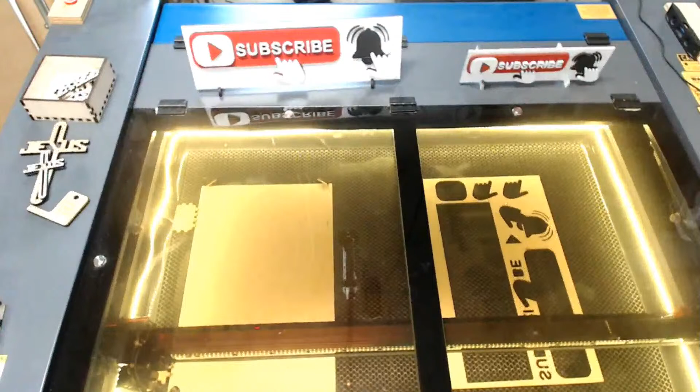One of them is just the heart-shaped box, and of course I have adjusted it just a little bit, adjusted the scale, so hopefully it'll work with the material I'm trying to use. But we will see, that's one of the reasons why I'm out here doing this, is to check that stuff too.

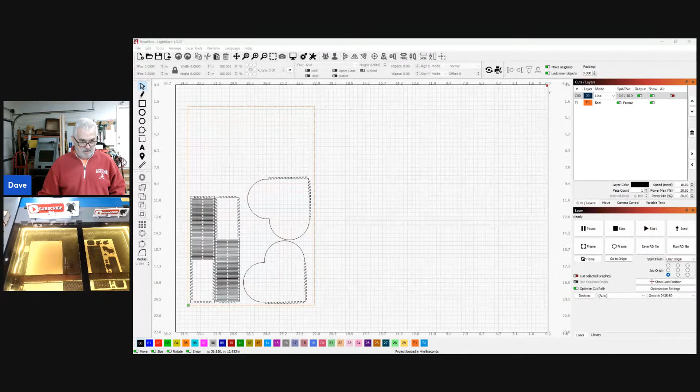So let me get the share screen over here too. You can see that this is one of them. It's just nothing but a simple little heart-shaped box, and of course it's got the live edge or living edge, I don't know what they call that, the flex edge, so that you can bend it around. So I don't have any idea if this is going to work, if it's going to fit or not, but here I am trying it.

And I figured, what the heck, I'll go live while I'm out here. Maybe somebody will get something out of watching this.

Anyway, I have already done the frame, and you can see it framing there. It should fit in the material okay.

So I'm going to go ahead and hit start as soon as I get my fan turned on. Turn on the lasers. Already checked the focus, so we should be good to go. So let's hit it, see what happens.

Let me adjust that camera just a little bit more. I think that's a little better. Now I can watch it and keep an eye on the chat here.

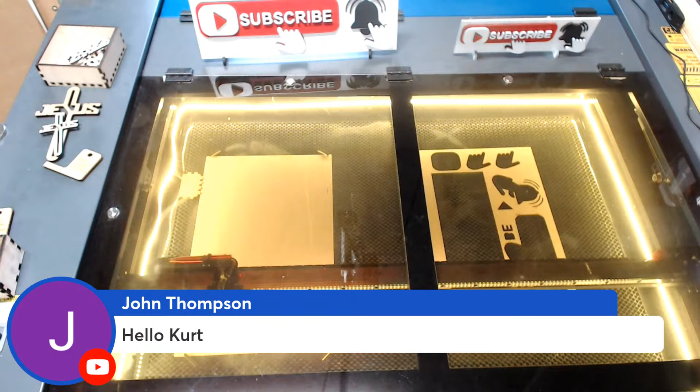Looks like we got about a dozen or so people hanging out here, that's pretty cool. John Thompson's in the house, how you doing John? Let's see, Jerry's in the house, how you doing Jerry? I saw your beast you got in there, pretty excited for you man. Can't wait to see what you do with that thing. I bet you're going to be making some awesome stuff with it.

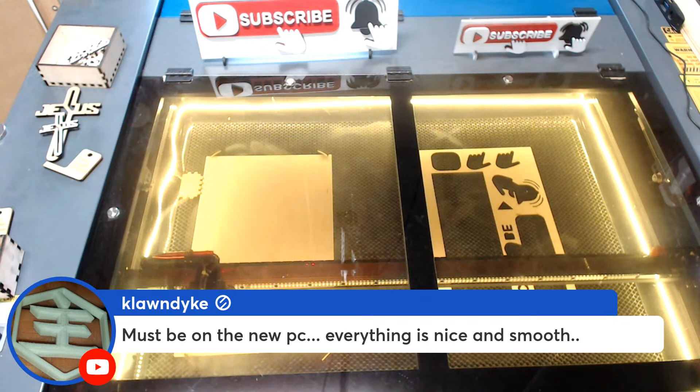Must be the new PC. Everything is nice and smooth. I thought everything was going to be cool last week, and then I had those problems. I went back and watched it, and I thought, oh good Lord, if it had been me watching it, I would have left because it was that bad. I couldn't even hardly watch it. I kept grabbing the slider moving it over to see if it gets better, and it just seemed to get worse. So that was a terrible live stream, and I thought, this is it, I'm not doing this anymore.

So I've made some big changes out here, one of them just a few minutes ago. You probably heard me talk about this. I have had some Cat 5 cable running from my router, around my office, down my hallway, and out this door right here behind me. I do that off and on for years. I'd roll it up, and when I get ready to do a live stream, I'd unroll it again. That's how I've been dealing with it.

Yesterday, or maybe it was Monday, I can't remember what day it was, but anyway, I have had this 100-foot, I think it's actually 144-foot roll of Cat 6 outdoor cable. It's the kind where you can just lay it on the ground or string it up in the air, but you don't have to bury it. It's made for outdoors, and that's what I have running to my other shop out there. But I just never ran that.

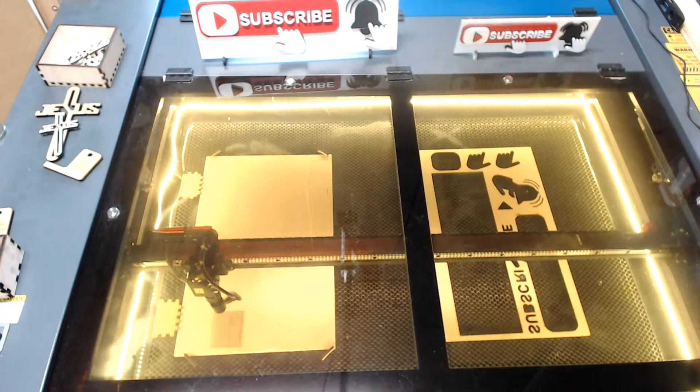But anyway, I took my 3D printer the last couple of days and made some clips, so I've got it all kind of clipped up. It's still nothing fancy, but the way my camera angles are, you'll never see it. Now I've got the cable all out of the way, so I won't trip over it in the house or out here in the shop, and it should provide a really strong signal.

In fact, I did the Spectrum speed test the other day, and it was like 460 down and 22 up or something like that. So I'm getting all I'm paying for now, in the office and out here. So looking forward to some improved live streams.

Now, if I can, just keep checking this mic every time and make sure it didn't get moved to a different microphone, because I could have sworn I was using that one, but I think it just had the light lit up because it was plugged in, so it was getting the USB power, but it isn't the actual mic it was using, and that's what messed me up.

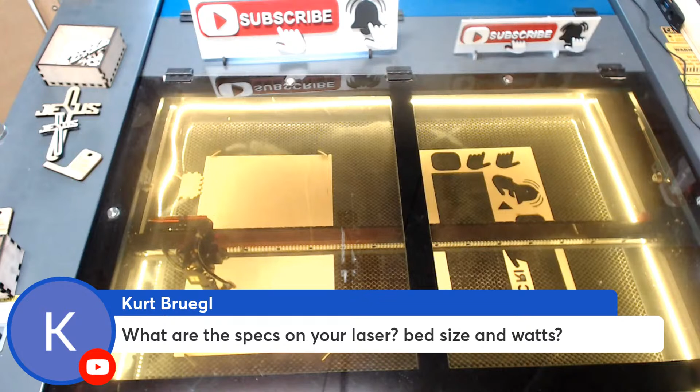Kurt says, all right, good question, Kurt. He says, what are the specs on your laser, bed size, and watts? I can answer that question.

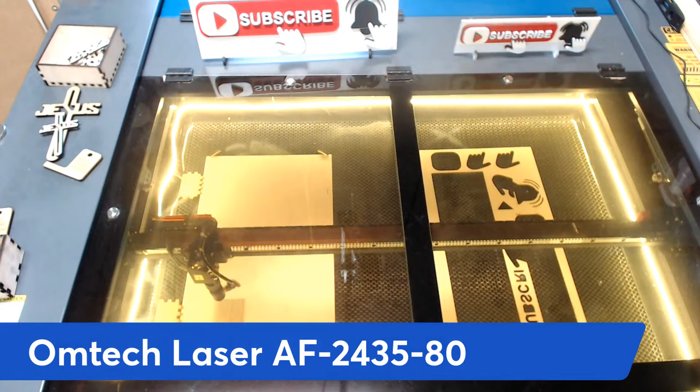Let me come over here. This is an Omtech laser. The model number is AF2435-80, which means that it is an autofocus, although I'll tell you about that in a little bit. I don't use the autofocus part because I have the lens kit from American Photonics, so I don't even use the autofocus part. It does give me the ability to raise and lower the bed with a push of a button, so that's really the only big deal about it for me.

The 2435 means that the bed size is approximately 24 inches by 35 inches, or if you're used to millimeters, that's 600 by 900 millimeters. And then the dash 80 simply means that it's an 80-watt laser. So that is all the specs.

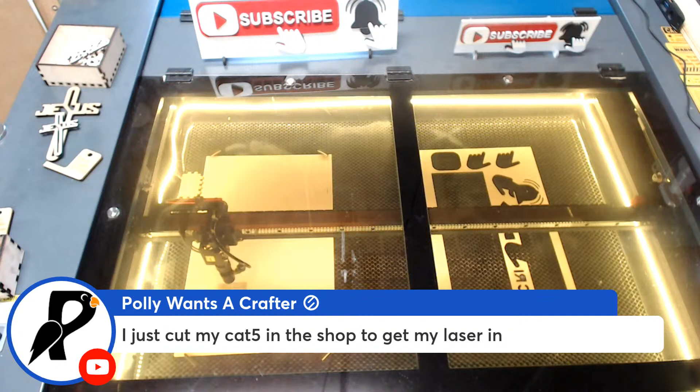And let's see what else we got over here in the comments. Jerry says, I just cut my Cat 5 in the shop to get my laser in. Yeah.

Jerry says the AF. And tell them why you know that, Jerry. Tell them why you know exactly what I'm running here. Let's see.

There's the answer. He just got that laser in his shop, the exact same one I have. Although I have to say his is prettier because mine got a little bit dented up in transit. So I'm a little bit jealous because when I saw your picture, Jerry, yours looked awesome. No banged up stuff or nothing.

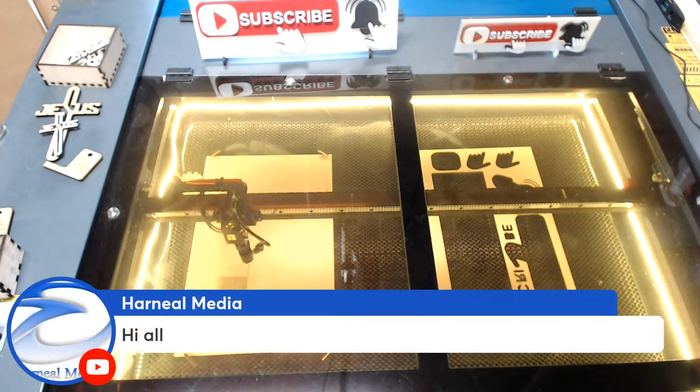So pretty cool. Steve's in the house. How you doing, Steve? We're just fiddling around with some laser beams today.

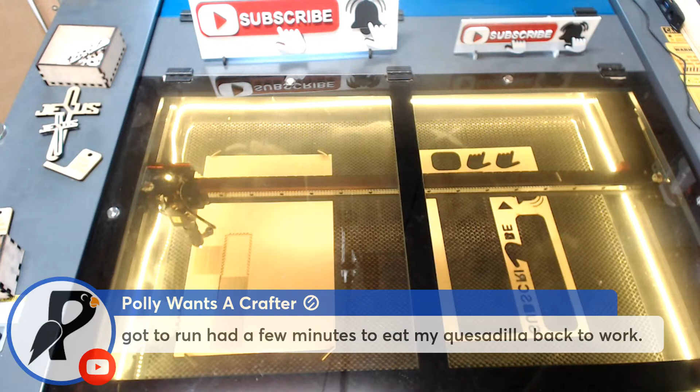Yeah, Jerry's going to have to run. All right, yeah. Quesadilla and back to work, yep.

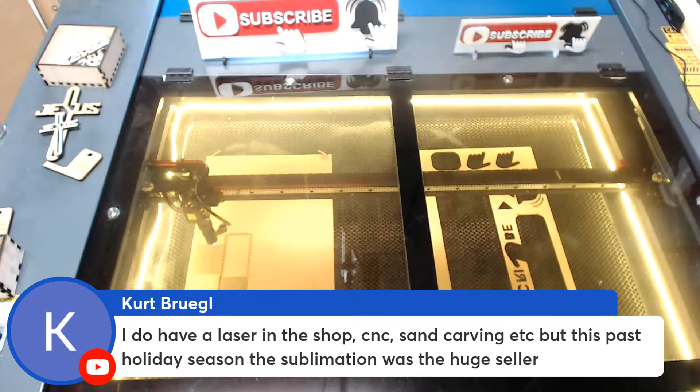I do have a laser in the shop, CNC, sand carving, etc. But this past holiday season, sublimation was the huge seller. I run in spells where I get into something, and if I see something that looks cool, I go ahead and try it. I don't want to be one of those guys who never gets around to doing something. I want to try as many different things as I can. So I got a vinyl cutter and a heat press and started doing some sublimation on wood and MDF. The bad thing I did, though, was I had, I think it was an Epson printer.

I believe it was Epson, one of those where you can buy it, and as long as you don't put the ink that comes with it in it, you can turn it into a sublimation printer using sublimation ink. I did that, and it worked great. But then I went quite a while without using it, and when I went to use it again, all the nozzles and stuff were clogged up. So I still haven't dealt with that.

By the way, for those who might be wondering, this should take about 19 minutes and 56 seconds. It's been running about 14 so far.

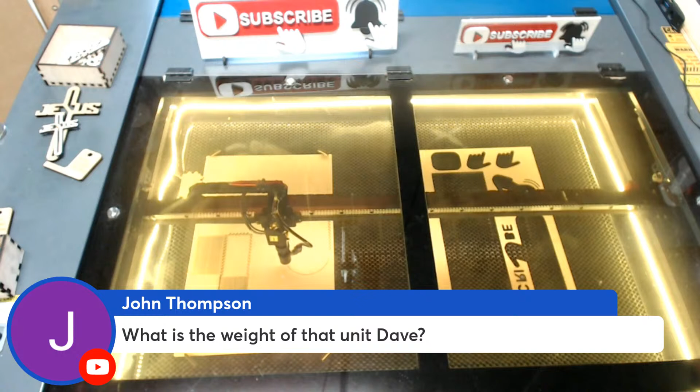Let's see here. John asks what the weight of that unit is. I think you can probably find all the specs. It's been a while since I've looked at it, but I want to say that after I got it off the crate -- and if Jerry's still here, that should be fresher in his mind, he might know -- but I want to say the net weight, once you get it off the crate, is about 421 pounds. For some reason that number pops in my head. But it's heavy.

It is definitely heavy. The guy with the lift gate and the pallet jack wheeled it right in here, but then I had to do all the rest of it. I show taking the crate apart in a video, but I don't show myself wheeling it off of the crate itself. I was afraid if I tried to video that, there'd be too much colorful language, so I didn't film that part.

But I had to take a long 2x4 -- no, actually I used a piece of rectangle tubing I had laying around, and used that as leverage to lift it up and move it a little, then set it down, move that lever over, lift up and move it again. So I had to do it that way to get it off the crate. Of course, once you get it off the crate and put it on the casters, you can roll it around real easy.

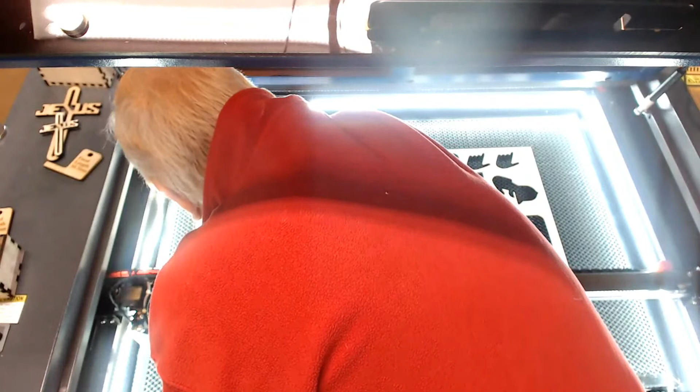Everybody does see the back of my head. I was thinking about that when I'm rewatching this stuff. I'm like, I would love to see the back of my head too.

All right, let's see if this works. I can throw this brown paper on here to really help the camera focus.

Yeah, I see there's a lot of burn marks on the bottom side. Not too bad on this side, but I'm really not worrying about that. I'm just running this kind of as a test. I don't even know if this is going to fit.

All right, let me come back here to my LightBurn.

And the other thing I was going to try to run was this one, and I don't know why they call it a casket, Valentine box, but I'm going to try to run that next.

Let's see here, my mouse going here.

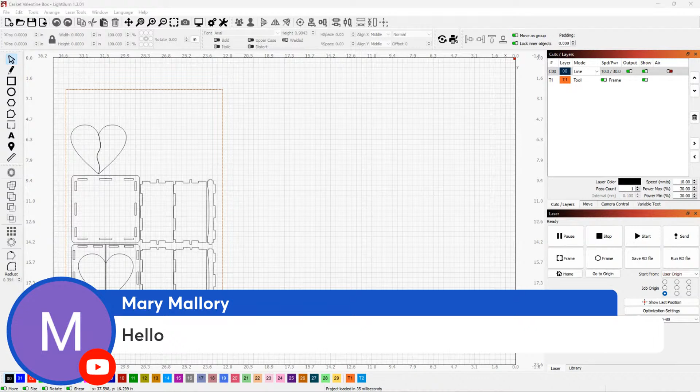Mary Mallory's in the house. How you doing, Mary? Hope you're doing well, hope you're getting some good weather up there in the Danville area.

All right, so this is the next one I'm going to run. I thought this was kind of a cool little box. And again, this website, let me show that website again. Let me get my mouse to cooperate. Both of these projects you're watching come from this website.

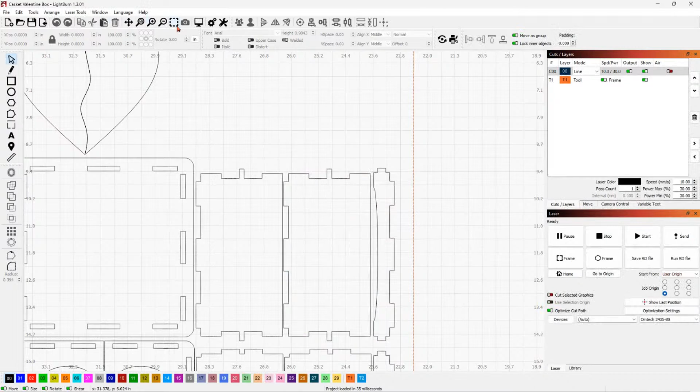So when I highlight this with this ruler, you'll see over here where it says width and height. So if I come over here, it says that the height is 0.1417, which if I change this to millimeters, you'll see that it's 3.6 millimeters is the height. It was 3, so I had to scale everything to get it to 3.6.

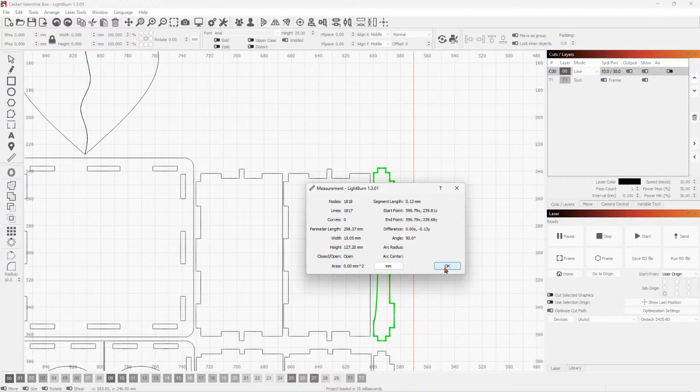Because that's the material I'm using, I use the 5/32 pure bond plywood that I buy from Home Depot. I might have a link for that in the description if anybody wants to check it out. I just ordered through Home Depot, it comes drop shipped from Columbia Forest Products in North Carolina, so it doesn't have far to get to me. I usually get a box in a couple of days, so I usually order 3 or 4 boxes at a time.

All right, let me back over here and we will get ready to fire this up. I'm going to leave it on that so you don't have to look at the back of my head while I put a new blank in.

For those who are maybe new or don't know that much about LightBurn, you see this red box going around here, that's the 12x19 blank that I'm using. So that way I can put it on there, I know my origin's right there on the corner, I can make sure everything's going to fit. And then all I have to do is frame it and make sure it stays right on the inside of that wood, and I'm good.

So, all right, let's get ready to hit go on this one.

David from Core Woodworks is in the house, how you doing Dave? Old buddy Paul's in the house, how about it Paul, what's going on?

Normally don't see me this time of day, normally I'm out here just pedaling around by myself, but I wanted to test some internet connection stuff, some microphone stuff and all that, and I figured what better way to test than just go live while I'm out here pedaling around.

So all right, let's hit go on this and see what happens here. Let's see, take a look real quick, it's going to take only about 11 minutes to do this one. So there we go, I'll let it take off.

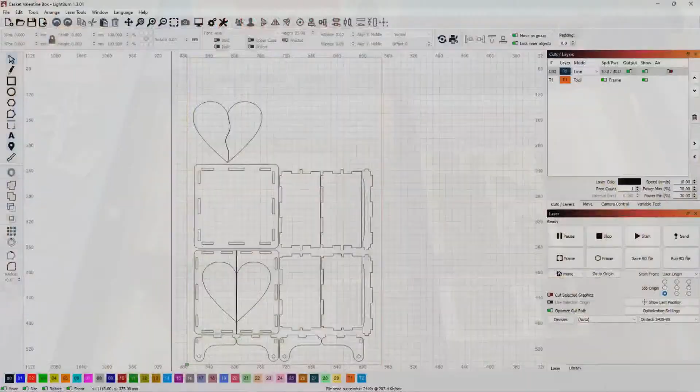This one's got a lot more pieces, so I hope I can figure out how to get it put together. It's actually supposed to have this part right here. It cuts it in two, and then you glue this half over here and this half over there, and it actually makes some doors or something like that. I don't know, I'll probably have to go back and look at the picture. But this is another project from that same website right there.

Yeah, I watched some of that, Robin. I saw that. I think you kind of called it hiding your crap or something, right? Is that what's in the title? That's why it caught my attention. I thought, well, I need to learn how to do that.

Yeah, it looks like this isn't going to take too long at all to run.

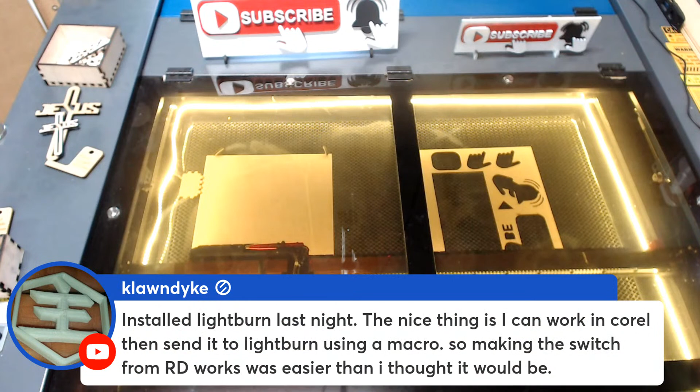Sean says, installed Lightburn last night. The nice thing is I can work in Corel and send it to Lightburn using a macro, so making the switch from RDWorks was easier than I thought it would be. Yeah, so far, Sean, as you probably know, I really don't do any design work, or what I call design work, in Lightburn, just because I'm not used to it. So I'm still using VCarve Pro to draw the vectors, do some stuff. Now, about the only thing I do in Lightburn is I can scale it and do some pretty simple things, add some text and stuff like that. But I just like to stick with using what I'm used to. And plus, you pay for VCarve Pro, it's pretty pricey, so might as well use it for something.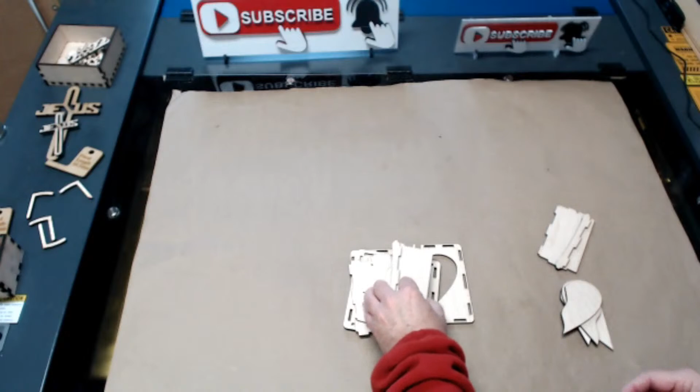Now I'll switch over here. I'm wondering if I messed up because, again, I don't really know. I'm going to have to go back and check the things. But here's the heart, they cut it in half. But it also cut these. At that, I was thinking that it was just to engrave that. Well, it would have been my fault when I didn't set it up. So I don't know.

Yeah, I think I messed that up. I think that was supposed to be engraved so that you set these on top and use that engraving for a line. So there y'all got to see me screw up something. I'm going to come over here to...

Let's see, where am I at here? One, two. Let's see if I can pull this up here. Okay, let's see, back to StreamYard. So I'm going to, this is what I'm looking at here. I'm going to go back and find... see if I can find that.

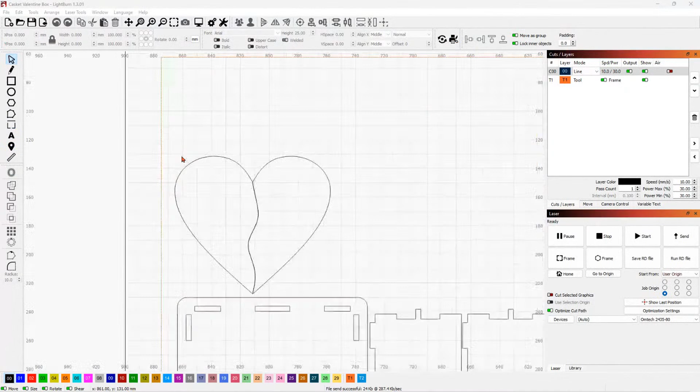Maybe. Okay, yeah, I'm looking at the wrong piece. Okay, so this right here... don't know, it's almost like they're saying that is supposed to get cut. Okay, it's this piece right here, that should be...

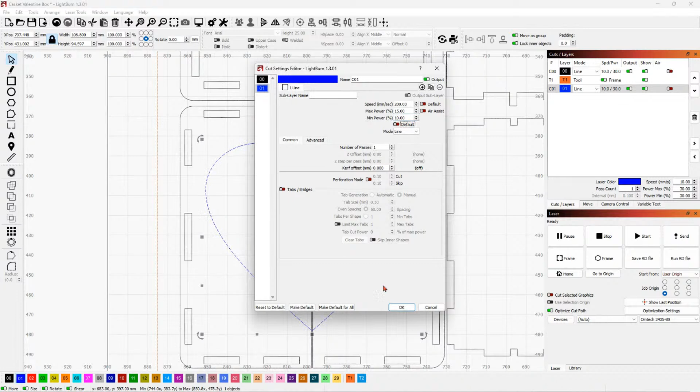So we'll put that on another layer, and we'll change that to 200, 15 and 10, I think will probably work. Bring this up. Let me save that.

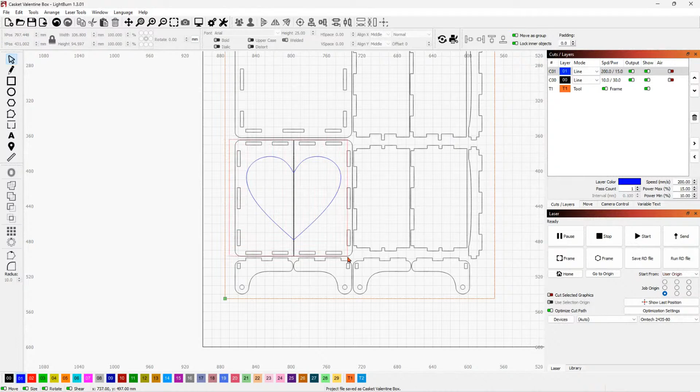Now, what I'm going to do, alright, copy that. New. Paste that in. Now I've got, it's just going to etch that line and recut that piece right there. So, should be good.

Let me move this other parts out of the way here. What I do, I think... oh, there it is. Rubber band, gotta help hold it together.

Alright, I think I can get by without putting any of those clamps on that. Now, since I don't have a box around this one, move that just a little. Okay, now I'm going to turn this. Let me go back in here where you can see what I'm doing. What I'm going to do is turn this layer off so that it doesn't cut to start with, because I want to make sure I get that engraved dark enough that I can see it.

So let's run that first. I don't think that needs to be going that fast.

That should be plenty good where I can see where to glue those other ones on there. So now I'll turn this one off, turn this one back on. Now we're ready to recut these two halves.

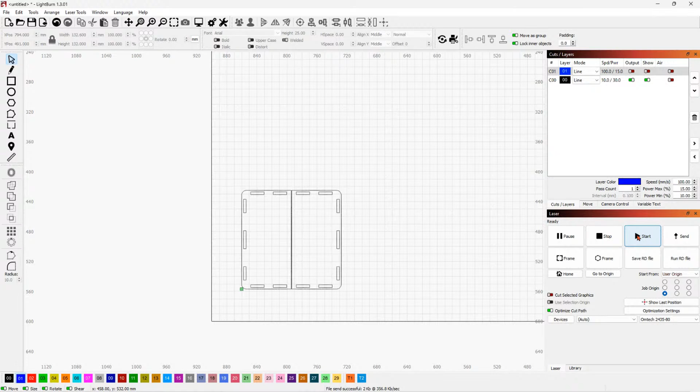Oh, I forgot to switch the camera, didn't I? But it's nearly done.

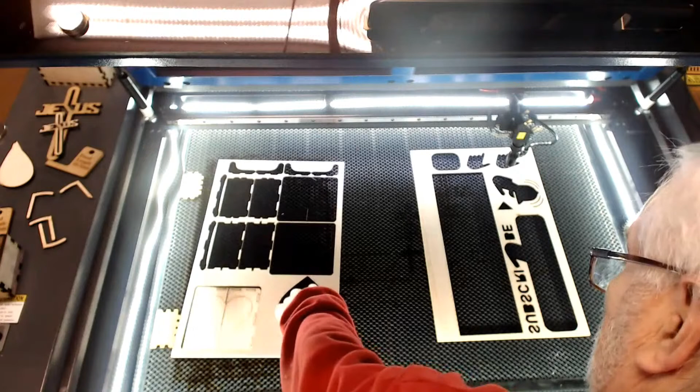Okay, that, I believe, is the correct way. Because now these little lines line up. As you can see, just a little bit overlap. So the box is closed.

So yeah, if you do go get that file, Sean put it in the chat there. Make sure you set those lines to not cut on this. And just think, there we go. Yeah, I think that's going to work good now.